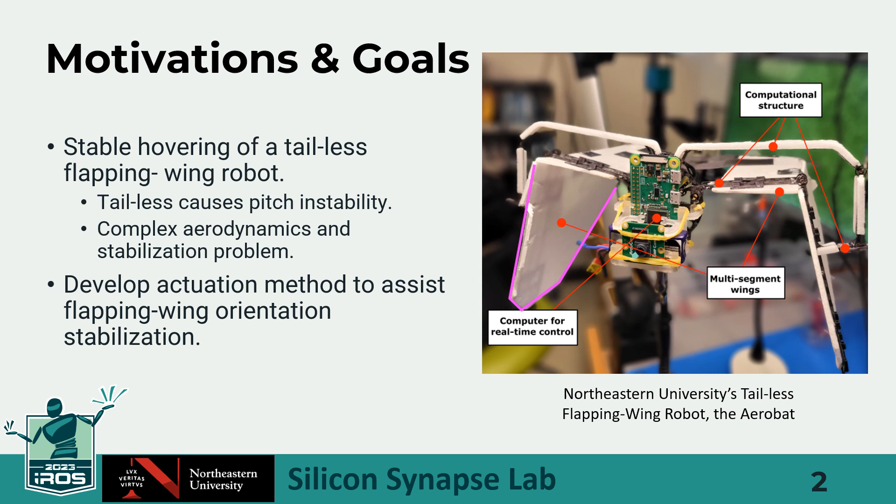We begin with our motivation and goal in this slide. This work is done on the tailless small flapping wing robot shown on the right. It's called the Aerobat. This design will be described in more detail in the next slide. The goal of this work is to stabilize this robot, which can be challenging because it's tailless, which means it has a pitch instability, and the complex aerodynamics from the flapping wing are also difficult to model and develop a controller for. So in this work, we'll develop a method to assist in stabilizing such a flapping wing system.

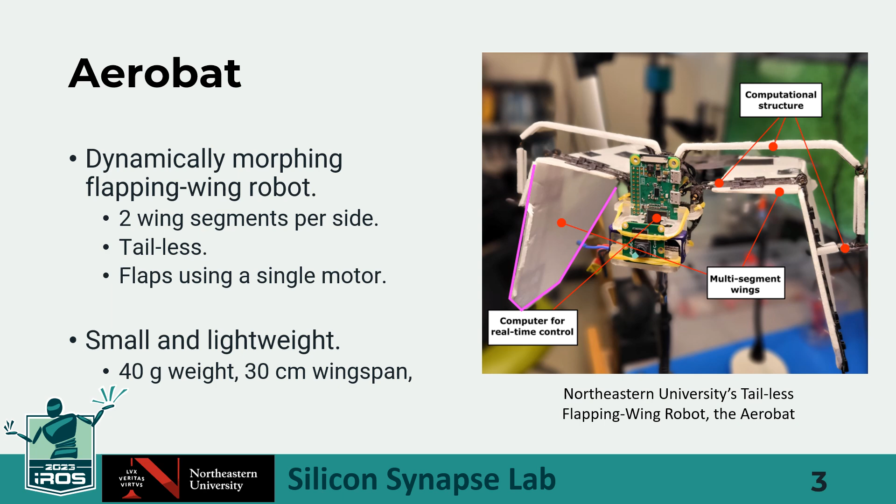In this slide, we will describe the Aerobat robot in more detail. This robot has two wing segments on each side, and it's driven by a series of linkages that we call the computational structure. This structure is designed such that both wings follow a certain flapping pattern, and it can be driven by a single motor located somewhere in the middle. And it also carries a small computer for calculating the controller and reading sensor data. It's small and lightweight. It only weighs 40 grams and has a 30 centimeter wingspan.

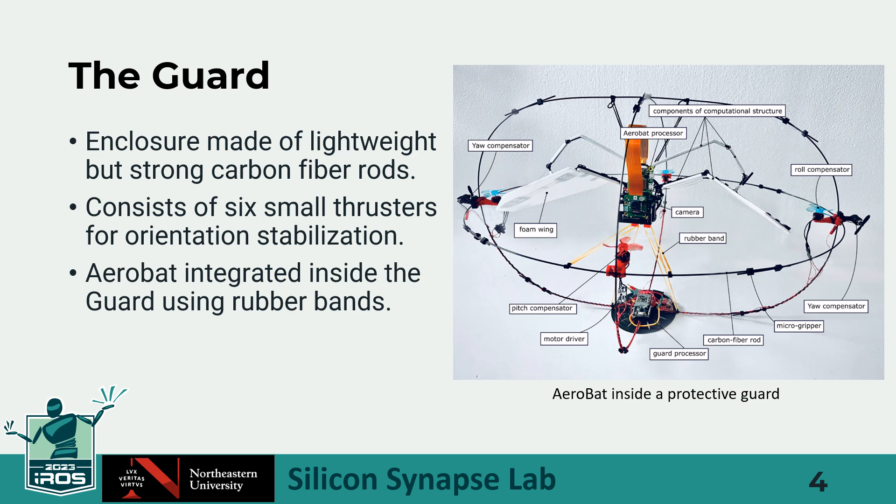This slide will describe the methodology to create a controller and stabilize the Aerobat using the guard propellers. As mentioned earlier, the guard is attached to the robot with a rubber band and affects the Aerobat through spring tension. So this is a simplified reduced order model. This is the guard frame, and it's attached with the rubber band to the main robot. So it's going to be important to develop a state observer so we can estimate the pose of the guard frame, and we can develop the controller for the propellers to stabilize the orientation.

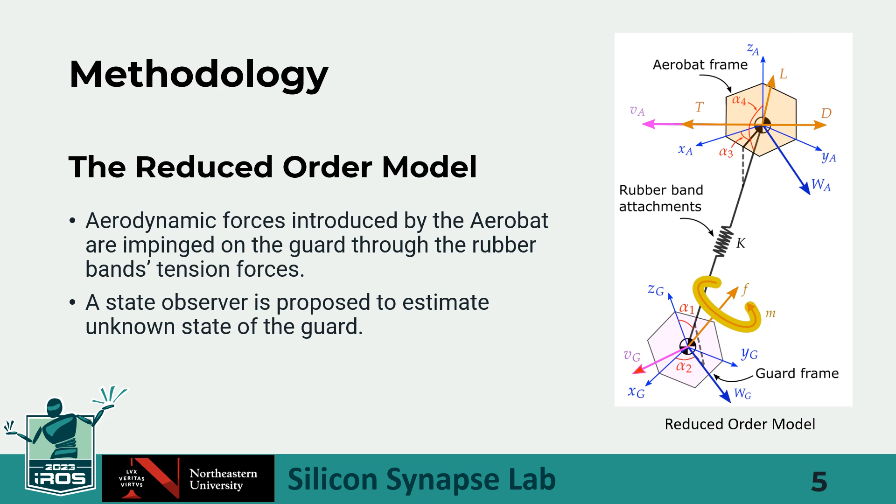In this slide, we'll explain the observer design. More complete derivations can be seen in the paper, but the general idea is we have this dynamic model. X1 being the guard pose and orientation, X2 is the rates of change, which depends on Coriolis and gravitational components, the forces from the propellers, and the pose of the Aerobat in the center, because it's attached with the rubber bands.

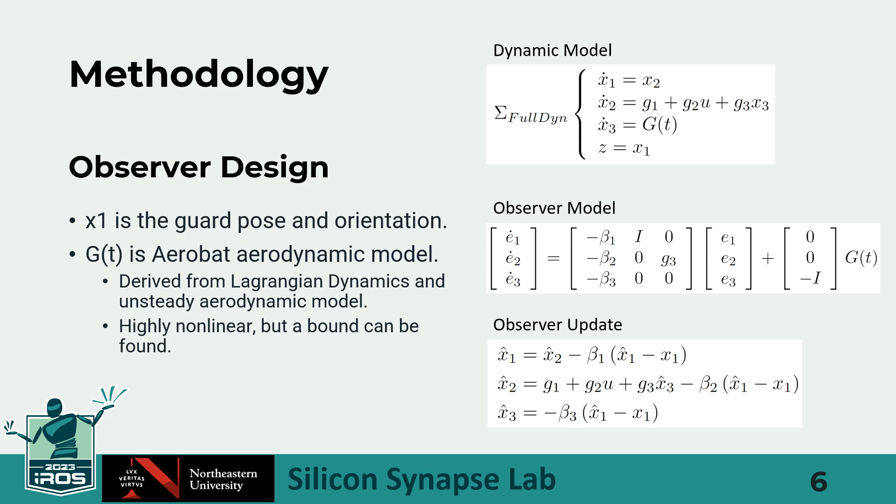X3 dot G of T is the aerodynamic state. It's highly nonlinear and difficult to compute, but it's possible to find a bound for this term. The observer output is Z, which is the guard pose and orientation, and the error of this observer model can be described over here, where beta are the observer gains. So we can describe it in this simple update model, and this will be used in the controller to stabilize the orientation.

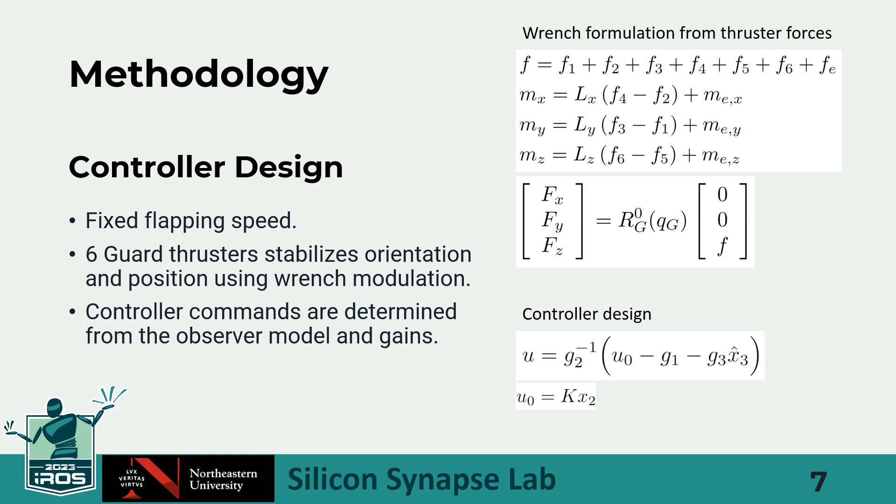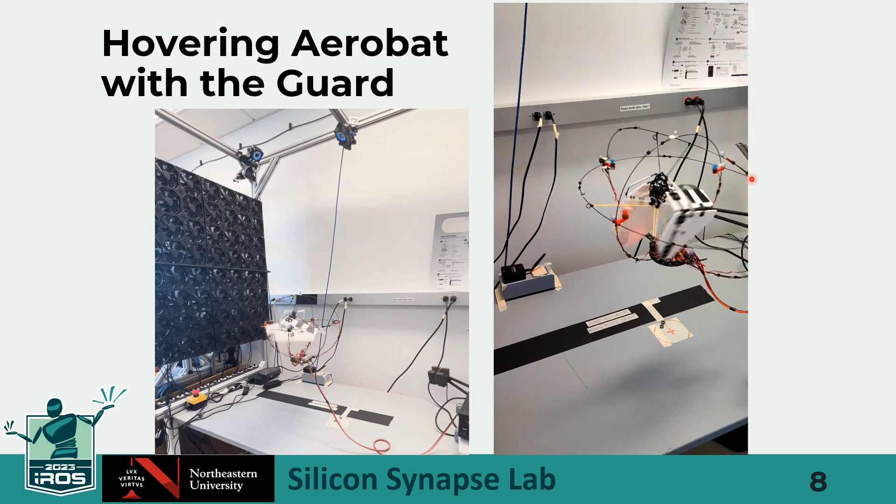This slide shows the experimental results of the robot. As you can see over here, the robot mostly stays in place and its orientation is also stable. There are markers attached to the cage, and those are for the feedback measurements for the observer regarding the position of the robot. The orientation can be calculated through the IMU.

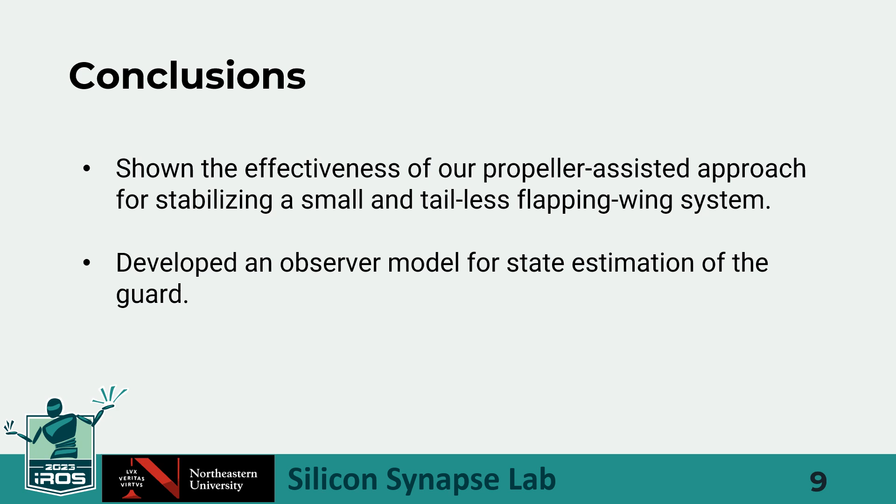In conclusion, we have shown the effectiveness of our propeller-assisted approach, the guard, for stabilizing a small and tailless flapping wing system. We have also developed an observer model for state estimation for the guard, and we can use it in the controller for orientation stabilization.